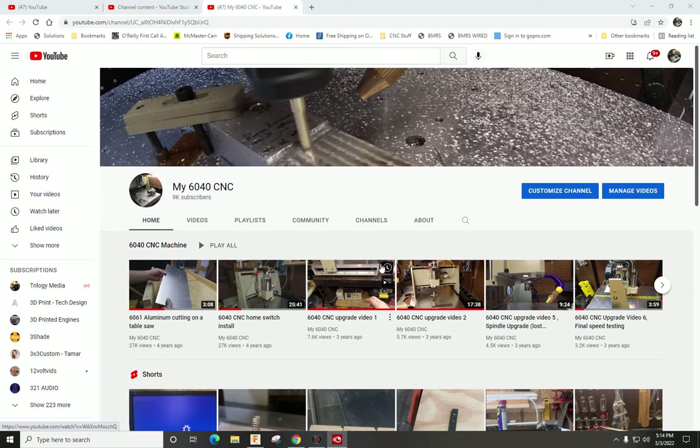So today I was doing a little research on a video that I was going to shoot, and I found a bug in Fusion 360 that affects people like me. If you've been to my YouTube channel, you see that I have videos on dog tags that I do. So there's an actual fixture that I have that lets you take 20 dog tags and put it on a table like this right here and get to run it.

Well, the way that I do this is I use Mach 3. So here's a demo, but it's licensed to me. I got it on my desktop here. When you go down to fixtures, you'll see there's a work offset table. So this table lets you identify 253 positions on your machine. So if you had like a 5x10 CNC router, you could quite easily fill that thing up with 253 positions.

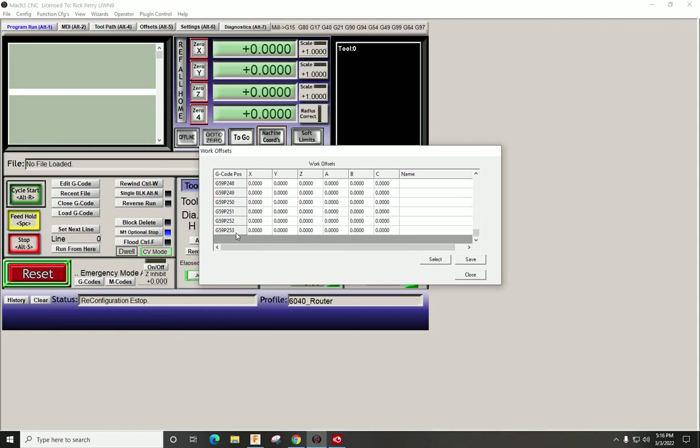So the way they work is G54, that's your X and Y, G55, your X and Y, and it goes all the way down, and when it gets to G59, the next one is G59P7. Then it goes P8, P9, P10. So the reason it starts at 7 is because this is the first 1, 2, 3, 4, 5, 6, P7. So in Mach 3, 253 separate work offsets. So let me close this out, and I'm going to show you.

When you have Fusion loaded, let's say I wanted to put this on my machine and cut 40 of these parts. So you draw it one time. You don't draw 40 parts. You come in here to setup, and I want to edit the setup. Now over here, the post process on the far right tab, you click that. If I only want to cut one, I'll uncheck this.

Work offset. This is normally set to 0. That's G54. Set it to 1, still G54. Multiple work offsets. With this, I'm going to cut 40 parts. One by one increment. I want to preserve my order and hit OK. So now when I right click and I go to post process, if I come up here, let's choose from the library like normal.

And if I come down to Mach 3 mill, highlight it, you see it's grayed out. You can't edit it, but you can export it. First, let's just export, and I'm going to show you what happens. So I hit select, and we're going to call this Coaster 40. That's the stock post processor. Then we're going to hit post. So we want to look at it. So it comes up, here's our Coaster stock post processor.

So I select that, hit save. It's going to say, do you want to replace it? Yes. Alright, so now we'll just close that down because we're not ready for that yet. So what I want to do, let's find that post-process. So from here, I'm just going to right click and we're going to open this. Open with Notepad. Simple. So this is the Mach 3 post processor from Artsoft.

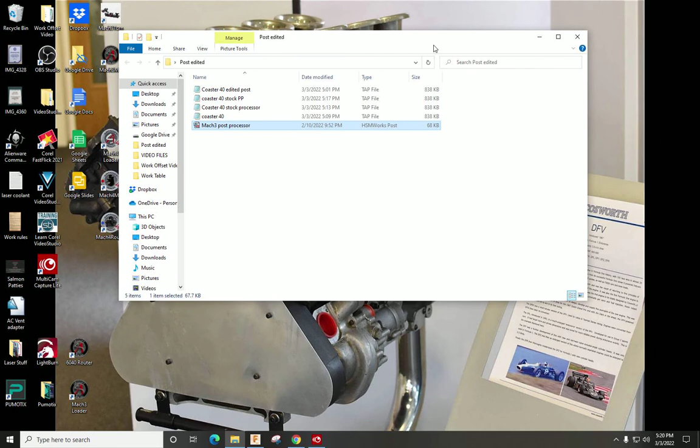So I'm going to scroll on down here. WCS definition. G59P. The range is 1 to 254. This is where the error is. If you change this to 7 and then save the file. Okay, now we can close it. And let's go back to our setup. So let's go to post process.

And then I'm going to select this. It's going to drop down. So I'm going to go to, let's say, cloud. And I'm going to import from, there we go. Open that. And now you'll see there's a little edit beside it that shows that we edited that.

Okay, so let's hit select. Then we're going to go over here, coaster, and this is coaster 40, then edited post processor. We'll hit post. Now when our code comes up, there's our coaster. We're going to hit find.

G5. Hit next. So there's our G54. 55, 56, 57, 58, 59, and G59 P7. That's what we need. Let's find the next one. P8, P9, 10, and so on. So now with this edited post processor, we can now run this correctly on Mach 3.

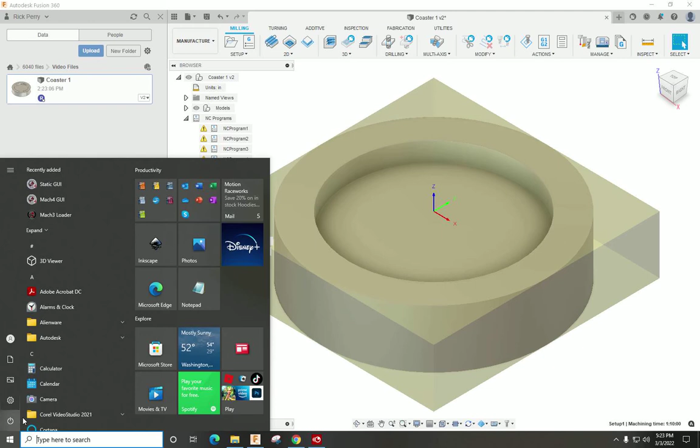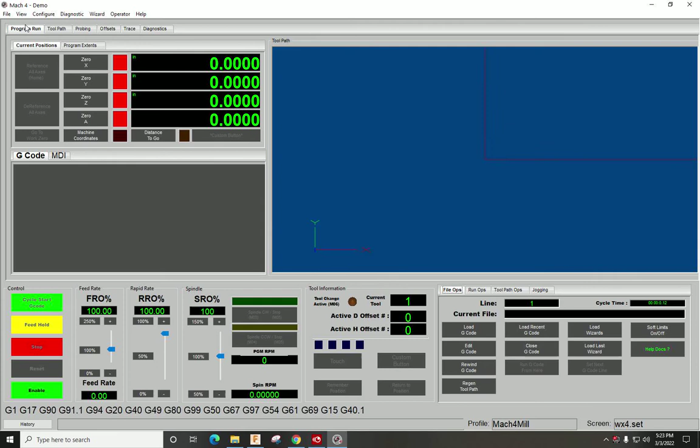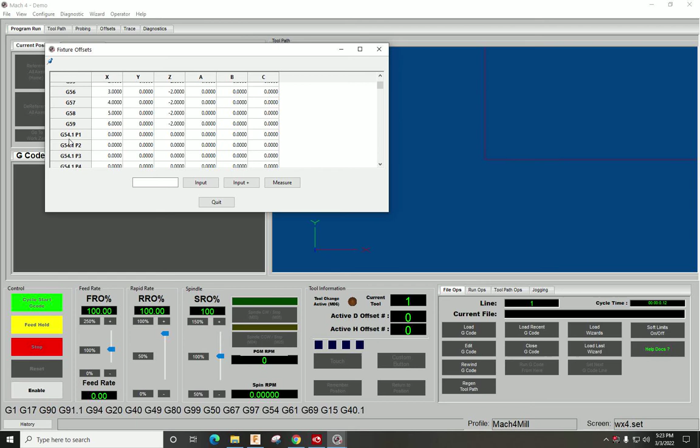I have looked at Mach 4, and if you come down here to Mach 4, okay, so I have a Mach 4 demo. Okay, when I drop down and do fixture offsets, you can see it goes to G59, then it goes G54.1 P1. So it's different between Mach 3 and Mach 4. So let's see what happens when I post this code under Mach 4, to see if I get the G54.1 P1. Okay, so let's go back to Fusion.

We'll come here to our setup, hit post process. We're going to drop down, go to our Fusion 360 library, and there's Artsoft Mach 4 mill right there. Select, and then we're going to say coaster 40 Mach 4, and let's see what we get. Okay,

so we're going to find G5. There's our G54. 55, 56, 57, 58, 59. And what do you know? There's G59 P1, G59 P2, 3. So it's the same exact error with the Mach 4 post of the code. So as it stands, in a stock configuration from Fusion 360 on Mach 3 and Mach 4, you cannot do anything above G59 unless you do the edit like I showed you.

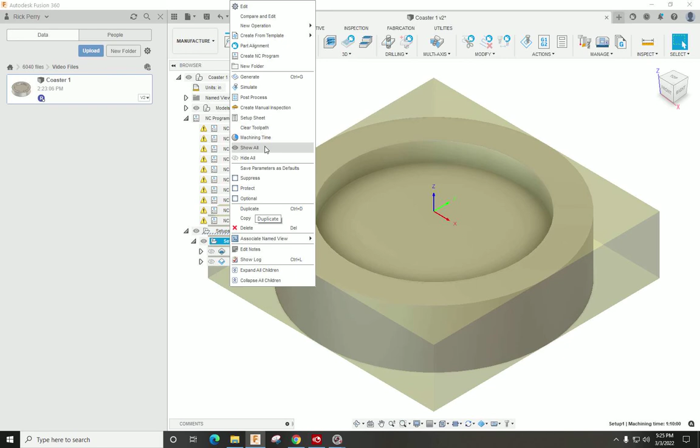I've not tried it with Mach 4, so let's try it with Mach 4. We're 10 minutes into the video. We got a little time. So we'll go to post process. I'm going to click here. And we'll go Mach 4 mill export. And we're just going to say Mach 4 post process. Save. Okay, now

open with Notepad. I'm not very familiar with Mach 4, so I don't even know if we can do this. I've only tested it with Mach 3. Alright. G54 to G59, format G59P. So I've not played around with this, but actually this whole area here is going to be wrong, because after this it's not going to do G59P.

After this, if I remember my coding right, this should say G54.1, range 1 to whatever's in the tool table on Mach 4, which is, oh, it does have P's, G54.1 P1, so that should say G54.1 P. It should go all the way down to 100.

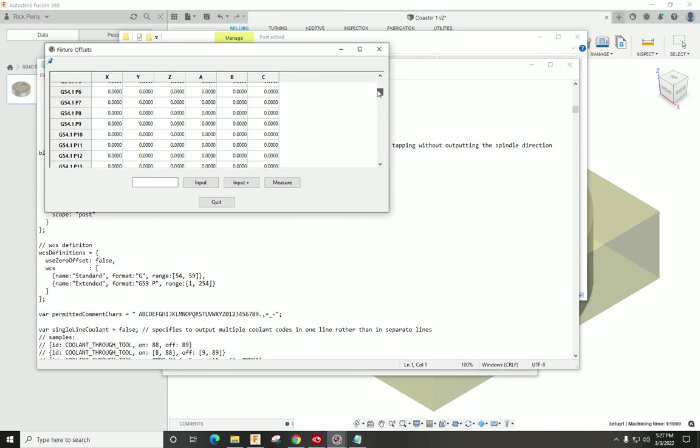Hey, let's give it a shot. So the format would be G54.1. The range would be 1 to 100. And let's save it. While you're watching, if you've made it this far, let's try to see if it will work. Alright, so let's go back.

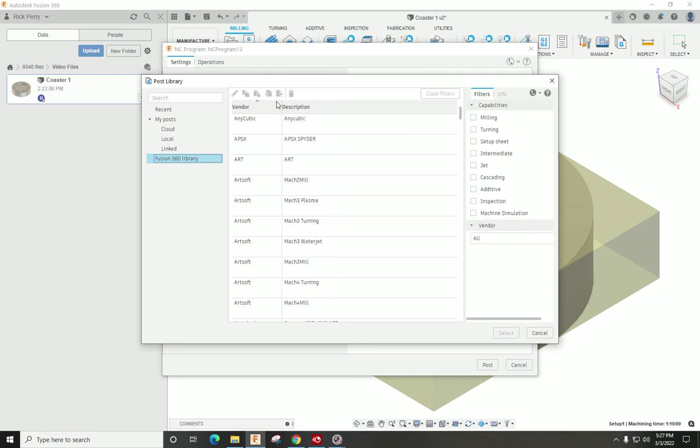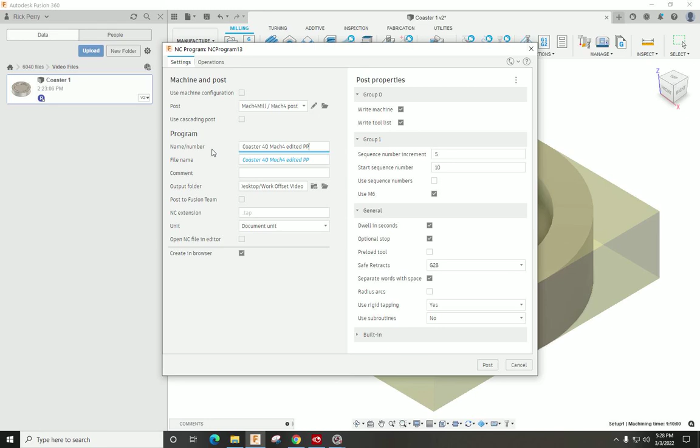Let's go to my cloud. Let's import Mach 4 post processor and select. So let's say coaster 40, Mach 4 edited post processor. Whoop. Okay, hit post. Now let's see what we did.

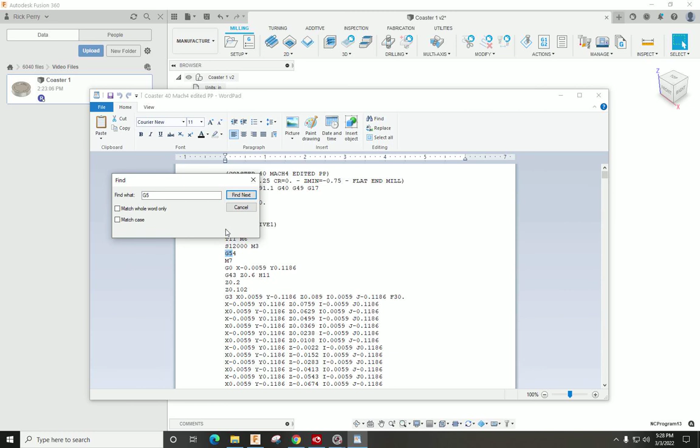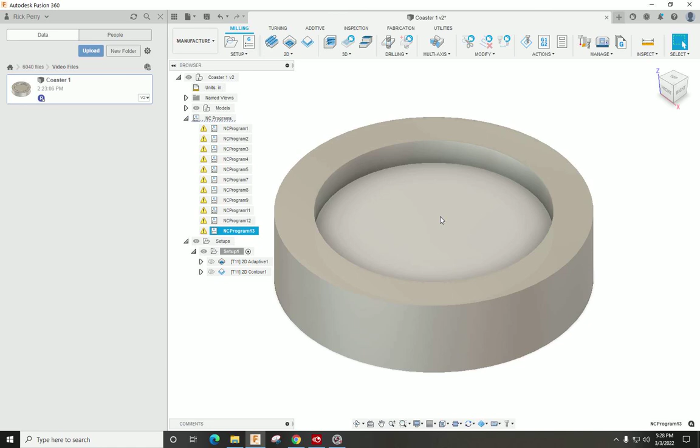G5, so there's our 54. 55, 56, 57, 58, 59. G54.1 P1. That's exactly what Mach 4 is looking for. G54.1 P1. Okay, that's it. I'm going to call that a success. So this is how you correct the Fusion 360 post processor for Mach 3 and Mach 4 so that you can use the extended work offsets.